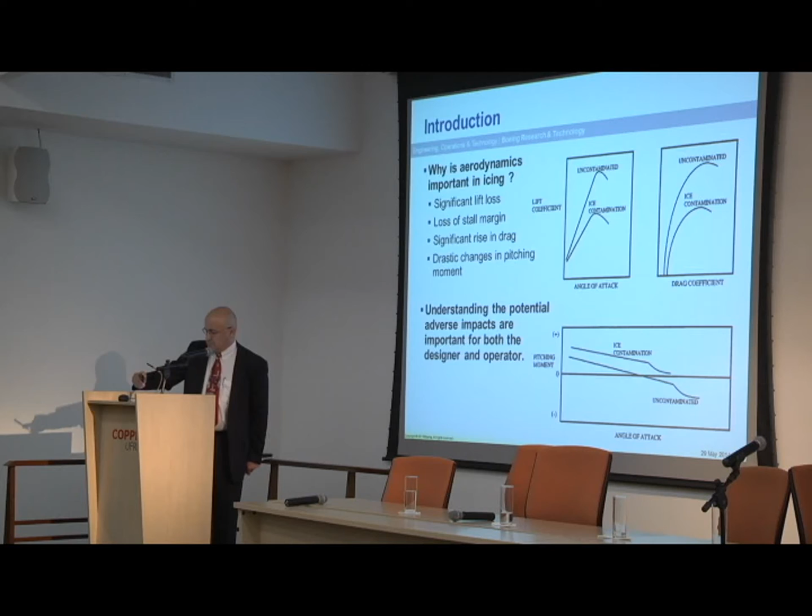So I was looking at historical data, digging up historical pictures - how far back can I go and find work being done in aircraft icing? These two next charts essentially show pictures - the first one here is an old DC-2, I think it is, back in the 1940s, where this work was done in combination or in collaboration between McDonnell Douglas, which is a former arm of the Boeing company, and NASA. At the time it was called NACA.

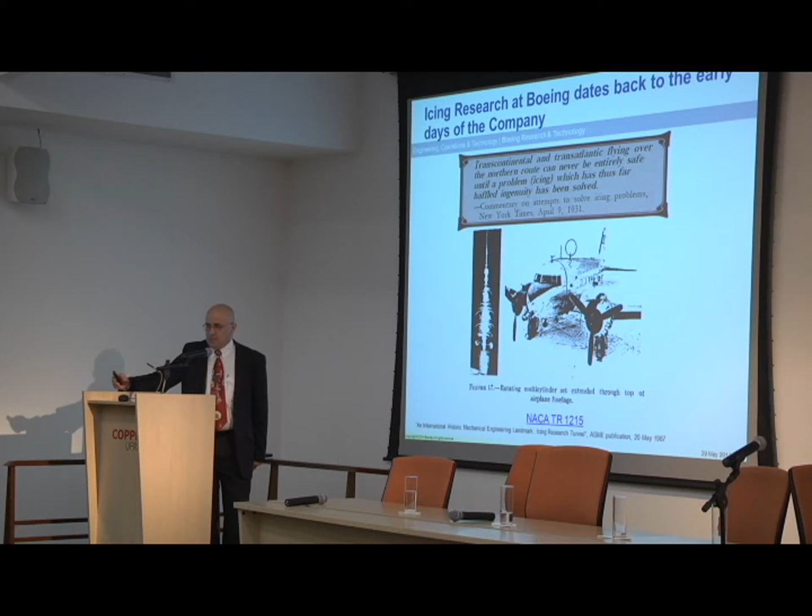And in this test, they mounted a rotating cylinder on the fuselage of the airplane. Through this measurement here, essentially, they're trying to document what the size of droplets are as you fly through an icing condition. The material that I extracted out of the American Society of Mechanical Engineers publication dates back to a New York Times article in 1931.

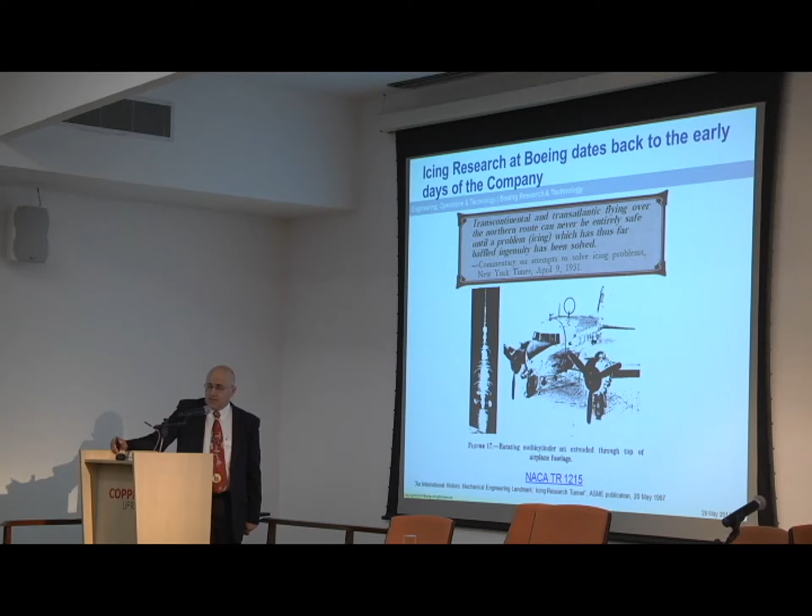Which essentially is referring to, look, if we're trying to make general aviation available to everybody - not just from 8 a.m. to 4 p.m., not just on days when the temperature is 75 degrees on the ground and sunny - if you're trying to do that, we really have to lick some serious problems, and one of them is icing. These guys recognized that, and in the New York Times, at the time arguably the most important publication in the country, they listed it there.

This is a picture that I dug up from one of the old Boeing archives, and some of you who are really good at recognizing airplanes will probably recognize this is a Boeing 707, right? The only airplane that has a needle coming out of it from this side. These measurements essentially were made back in 1962 in coordination with the Federal Aviation Administration and the Boeing company.

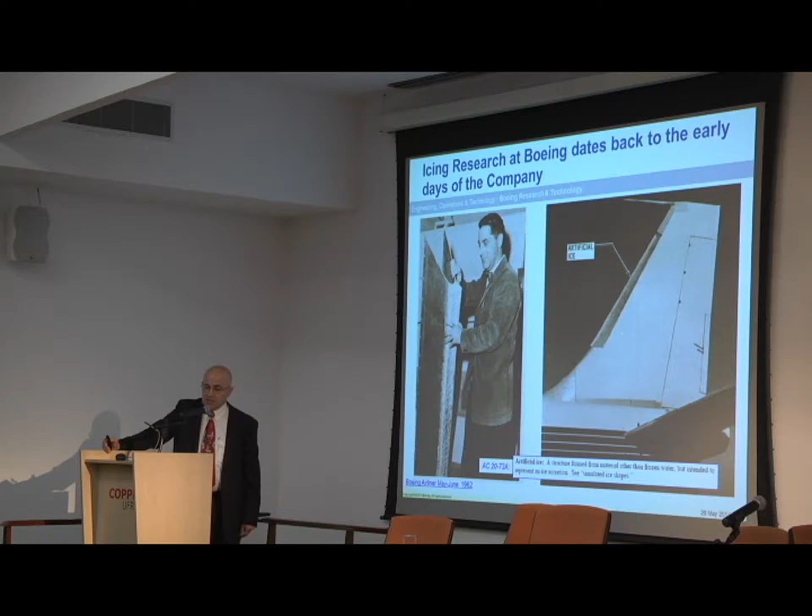Where they're putting simulated ice shapes that were manufactured or generated artificially, and mounting them on the vertical tail here, in order to fly with that simulated ice shape and determine: can the airplane's flying qualities and handling and control - are they acceptable from a piloting perspective as well as a safety perspective.

Okay, now, Boeing Company is the largest private operator of wind tunnels. Just in the United States alone, we have extensive facilities for testing in Philadelphia, in St. Louis, as well as in Seattle.

One key wind tunnel where Boeing is involved in the assessment of icing issues for both its existing airplanes as well as the next generation airplanes is called the Boeing Research Aero-Icing Tunnel, the BRAIT. This picture essentially shows a section of a wing, aircraft wing, where testing of relevant or representative icing conditions is taking place. This wind tunnel is located in Seattle, and it is in use almost constantly.

I am, of course, very much interested in seeing the icing tunnel that is going to be inaugurated tomorrow, and exploring possibilities if there's any work that Boeing and Brazil can do together in the icing facility, which apparently is the first one in the southern hemisphere.

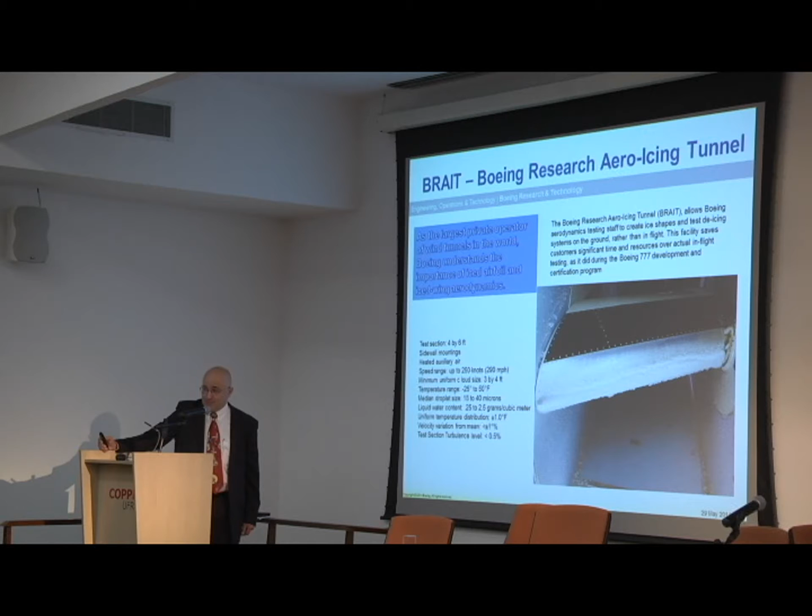We covered aerodynamic simulation considerations, the effect of ice on a range of typical icing environments, like initial roughness type environments, run back and ridge ice, which is something you get if you run into SLD conditions—SLD being the short term for supercooled large drops—as well as partially evaporative conditions, where the leading edge thermal anti-ice system does not fully evaporate the liquid that deposits on the flight surfaces, causing it to run back and refreeze downstream of the heated surfaces.

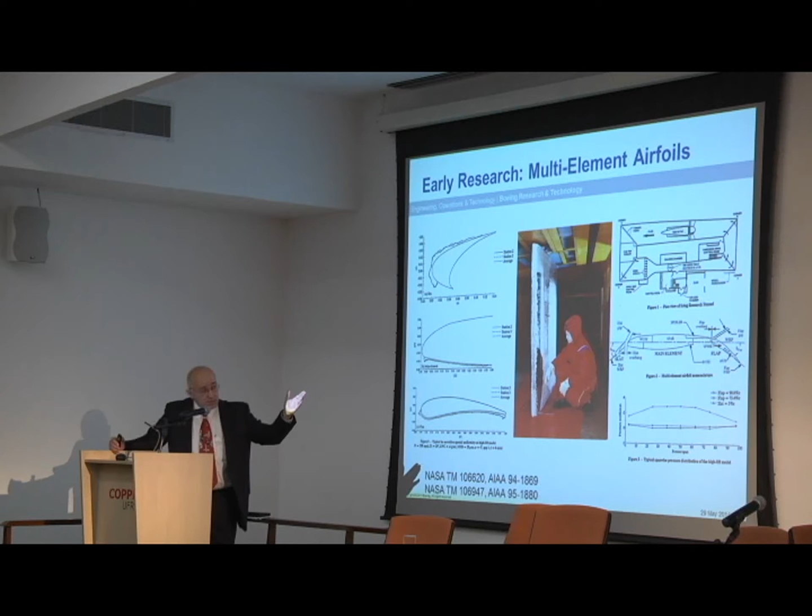The performance is very dependent on what we call confluent boundary layers—there are multiple boundary layers present on this type of complex system. Let me advance to the next chart, which has a better picture. Essentially you have a wake coming off the slat, a wake coming off the trailing edge of the main element, and then a wake coming off the flap.

All of these merging shear layers are very complex to predict. It's not like a simple boundary layer coming off a flat plate. The way the high-lift system develops its max lift performance capability is because of how you place the leading edge and the trailing edge in close proximity to the main element.

These gaps are critical for the performance of the airplane. That's why it was very important for us to understand what happens when you start to accumulate ice on these elements, and the ice essentially starts to impact those gaps that have been optimized for performance close to the ground. This picture shows a series of tests done at different flight conditions, representative of takeoff, landing, hold conditions, and cases where your thermal anti-ice might have gone inactive, things of that nature.

We accumulated a large database of ice accumulations in the Icing Research Tunnel, and we took select ones because these tests are very expensive. We have to be very selective in terms of which ones we pick, but we picked a select few and manufactured them out of material that we could take into a high-pressure tunnel and simulate the environments representative of a large transport airplane.

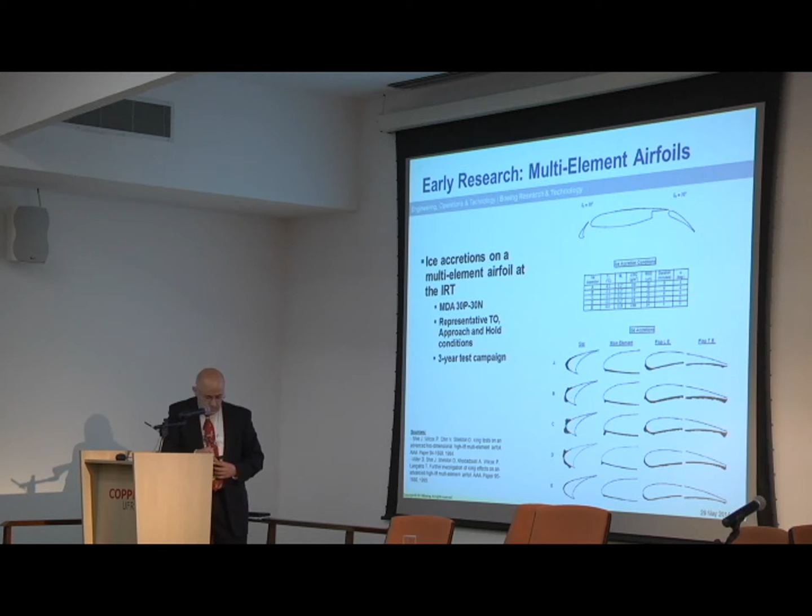What we ended up doing was take these ice shapes into the NASA Langley LTPT, the Low Turbulence Pressure Tunnel, and test them at flight scale conditions. Again, because of the confluent boundary layer, accurate simulation of the Reynolds number, flight Reynolds number, is critical.

In other words, with a high-lift system like this, if it's meant to operate on a Boeing, an Airbus, or an Embraer that wants to fly at about 35,000 feet, with a typical approach condition of about 200 knots, you're talking about Reynolds numbers on the order of 30 to 40 million.

Everybody knows how to calculate a Reynolds number, and you can quickly imagine what you need to do to calculate the Reynolds number when you're in a low-speed tunnel. That's one of the reasons why we increase the pressure in some of the tunnels, which is why we call it a pressurized facility. By increasing pressure, you're directly increasing density as part of the equation of state, and by increasing the density, you can increase the Reynolds number significantly.

What that really translates to is that I cannot test this kind of airplane or airfoil in a low-speed tunnel and assume the results I get are going to be representative of flight scale conditions. This is critical for a transport airplane designer. You have to understand what the flow field is, you have to understand the aerodynamics, in order to design for these critical safety conditions.

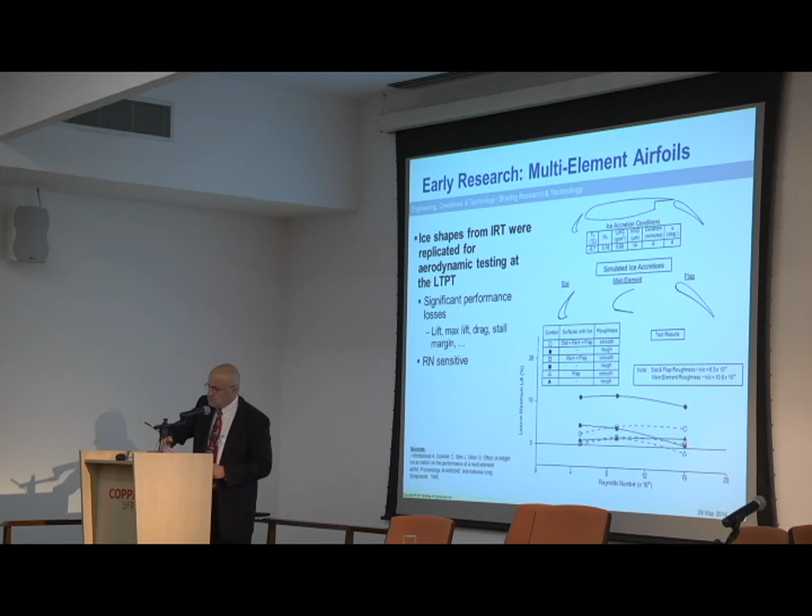Another topic we had to investigate, going back about 20 years, is what's called in-spar frost, or under-wing frost. Essentially the reason for this type of ice formation is that you take a wing of an airplane - in this case a 767 parked in Frankfurt - that just landed after flying at about 35,000 feet.

As a rule of thumb, if your temperature on the ground is around 70 to 75 degrees Fahrenheit, about 25 degrees Celsius, at 35,000 feet you're potentially at minus 60 degrees Fahrenheit, which is maybe about minus 50 degrees Celsius.

That very low temperature starts to impact the aircraft. Both the skin and just about everything that is not insulated will be very, very cold. Well, guess where the fuel is stored in the airplane? It's usually stored in the wings. This is the front spar of the wing.

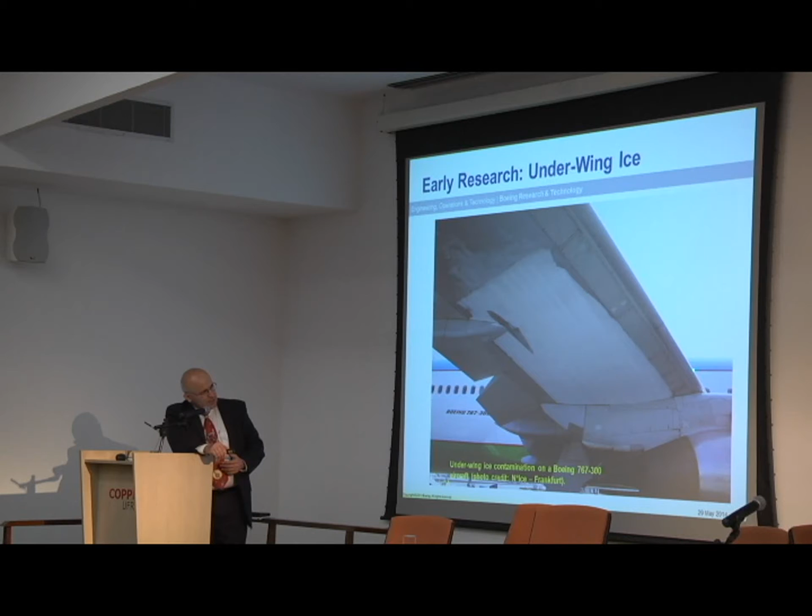You can see the engine, this is the leading edge. The front spar of the wing is out here, and the aft spar of the wing is typically somewhere just upstream of the control surfaces.

That cold-soaked fuel, turned very cold from flying at high altitude, when you land - say you land in Rio on a nice day where humidity is on the order of 80% - and the moisture conditions are just right, that cold fuel will force the aircraft skin into a condensation mode. Just about all the humidity in the air will start to condense on the aircraft surfaces.

Part of that is in close proximity to the fuel tank, which acts as a major heat sink because of all the fuel remaining in the tank, causing that moisture condensation - and that's where you get what is called in-spar frost, or in-spar ice.

The occurrence of this has become so common that both the FAA and, before EASA, what was called the JAA, became very interested in what the performance effect or impact is.

Because when this airplane lands, typically after a 1 or 2 hour flight, it's not done for the day - there's still fuel in it. They'll take about an hour to deboard passengers, take all the trash out, bring new passengers on board, put in fresh food, clean up the toilets, get it ready, and head back out again.

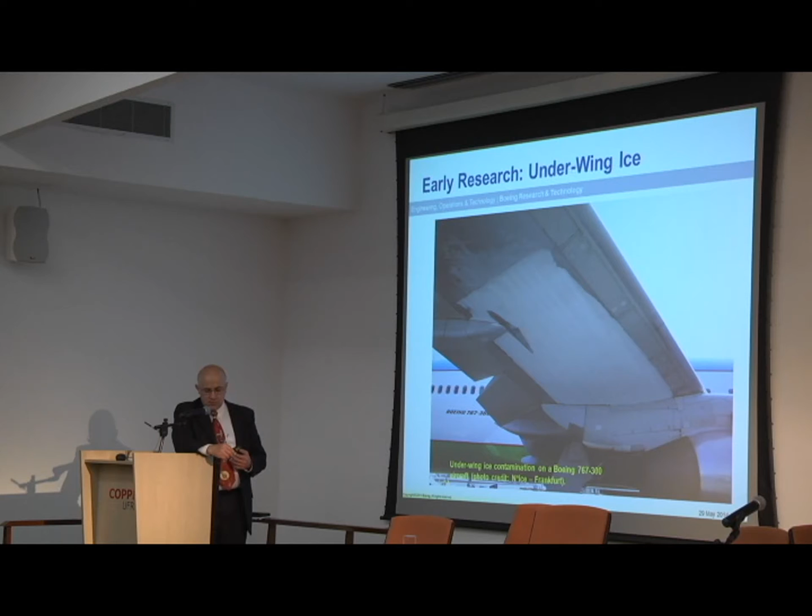Those results are shown with the wind tunnel test we did at the LTPT, the low turbulence pressure tunnel. We took an airfoil that was representative of takeoff conditions.

Boeing airplanes typically have their leading edges sealed, so you can see that in a sealed slat type configuration. Some other airplanes, I think some Airbus configurations, take off and land with what we call a gapped leading edge configuration, shown up here. We tested this configuration in the low turbulence pressure tunnel, and you can essentially see that the impact to max lift degradation as well as stall margin degradation is minimal.

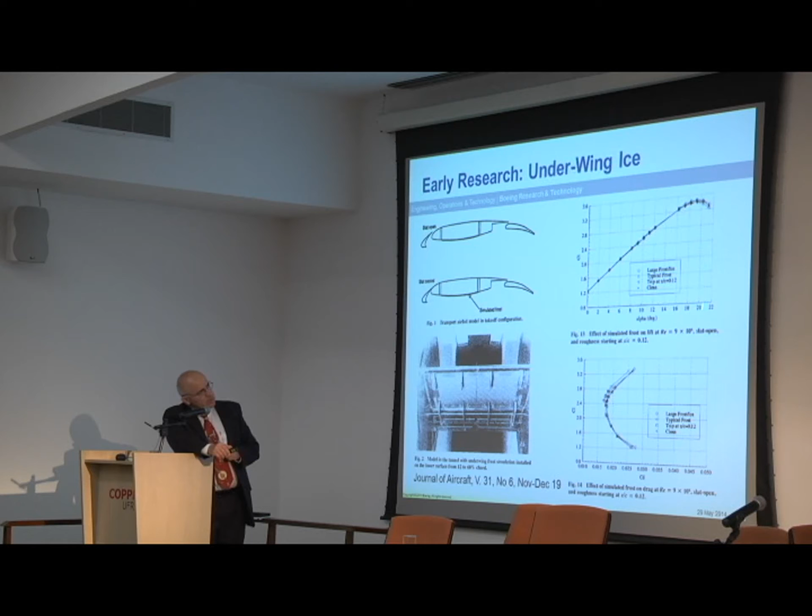And this gave us assurance that this type of meteorological phenomenon is not a hindrance to aircraft operations.

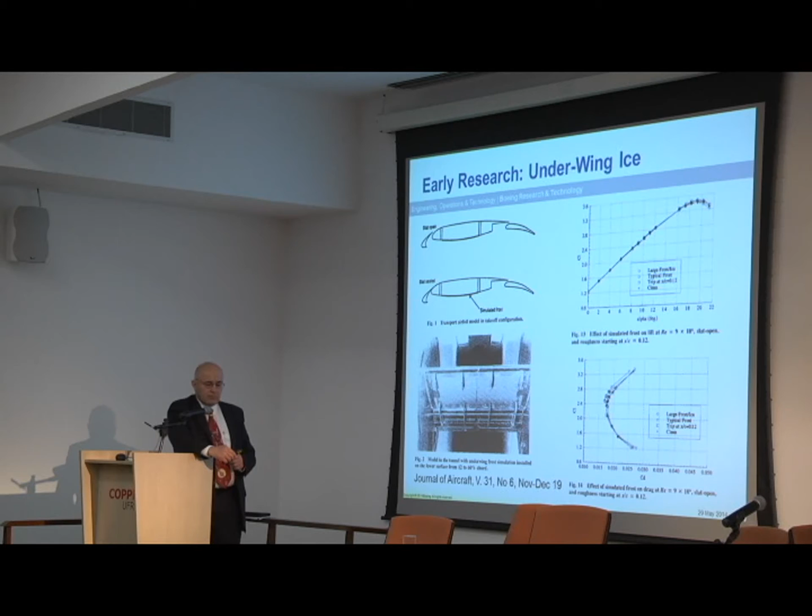So let's switch now to some of our current work. First I'll touch on rotorcraft icing, then switch back to transport airplane icing, and we'll finish off with spacecraft icing.

Rotorcraft icing, essentially what's listed on this chart is truly representative of the challenges we have in the world of aircraft icing, predicting ice-shape formations. Characteristic lengths in any kind of engineering problem, characteristic lengths, characteristic time - understanding that is very, very important.

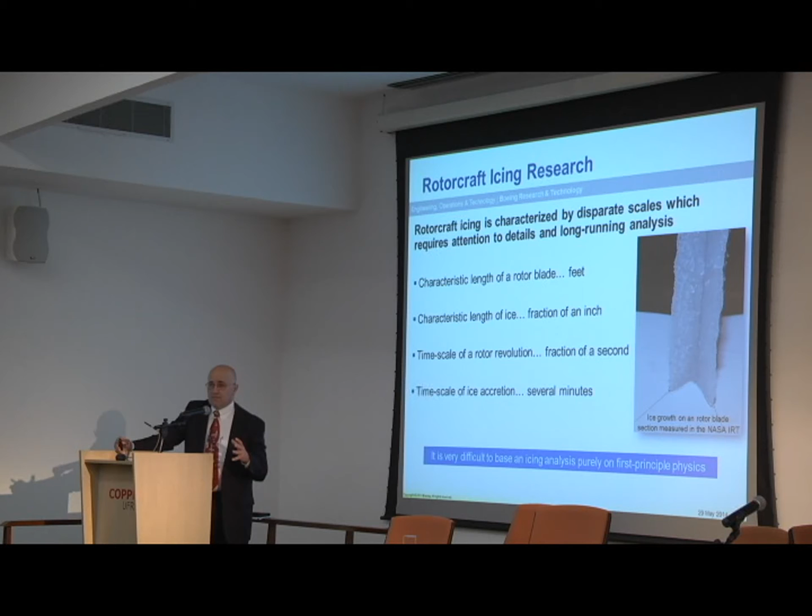So it's very difficult to use first principles to formulate the icing problem and really try to characterize it well. That is one of the reasons why, since the 1930s, the icing problem to this day still remains a challenge.

We have to do a lot of testing, both flight testing and ground testing, to make sure the airplane is safe. From a designer's perspective, my ultimate goal is that we can do all of the simulations in a computer, because that means we can do it efficiently. With testing, whether ground test or flight test, there's always a chance something may go wrong, and that's not a good thing. But in a computer, I can make all the mistakes I want and learn from it. We're still far from being there in the area of icing, but that's the push, we eventually want to get there.

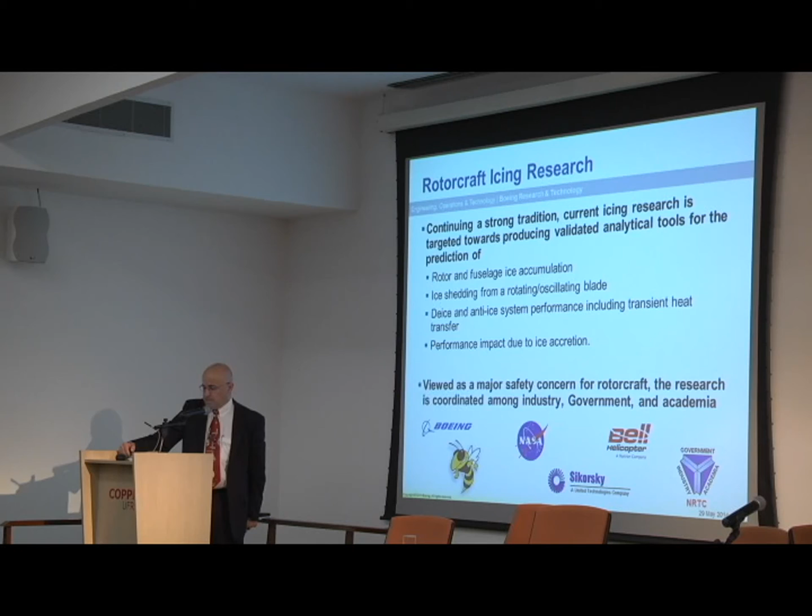Testing has been done by our Rotorcraft community at the Boeing company. Our primary testing facility is at the NASA Glenn Icing Research Tunnel because of its size. Tests were done in 2010 and 2013 to accumulate a large database of ice accretions to compare against the emerging prediction methods.

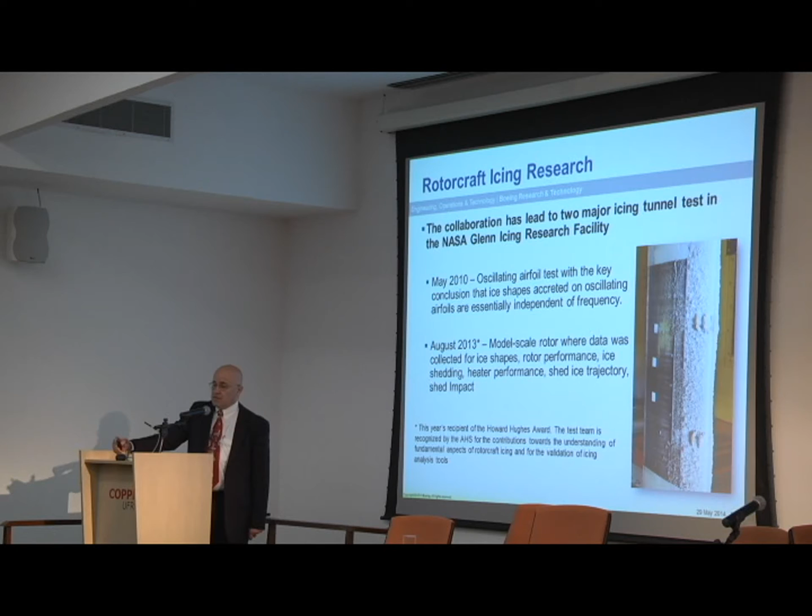This chart essentially shows how testing at Boeing is done in partnership with both NASA as well as the consortium, listed in the lower right-hand corner. NRTC stands for National Rotorcraft Technology Center. Boeing gets involved with a variety of government agencies as well as industry to solve this complex problem. As Boeing expands its relationship with the government of Brazil and expands our infrastructure in the country, this is potentially an area we need to look at for future collaboration.

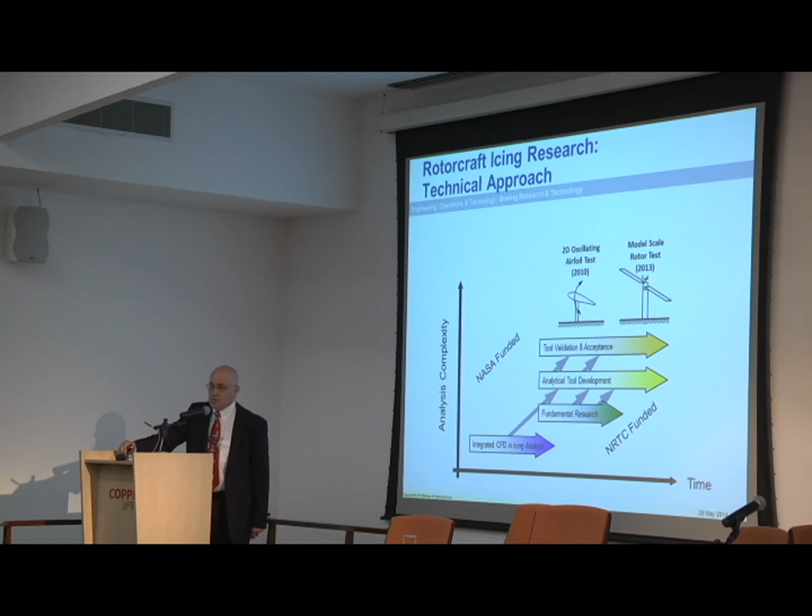Role of CFD - Computational Fluid Dynamics - is critical for us in many areas, in aircraft design and rotorcraft design. This picture shows a tool we use very heavily, called Overflow. Overflow is a simulation that takes advantage of the Reynolds Averaged Navier-Stokes form, RANS, on a structured grid type technology to predict the aerodynamic characteristics of a flight vehicle, in this case a rotorcraft.

It is coupled with what we call an ice prediction method, called LEWICE. LEWICE essentially is the Lewis Ice Accretion Code. Back before NASA Glenn was called NASA Glenn, it was called NASA Lewis, and the tool was developed there, hence LEWICE. It's a very heavy workhorse for us - just about all of the industry understands it and uses it for ice accretion methods. This picture shows the kind of simulations we've done using LEWICE on a rotorcraft type environment.

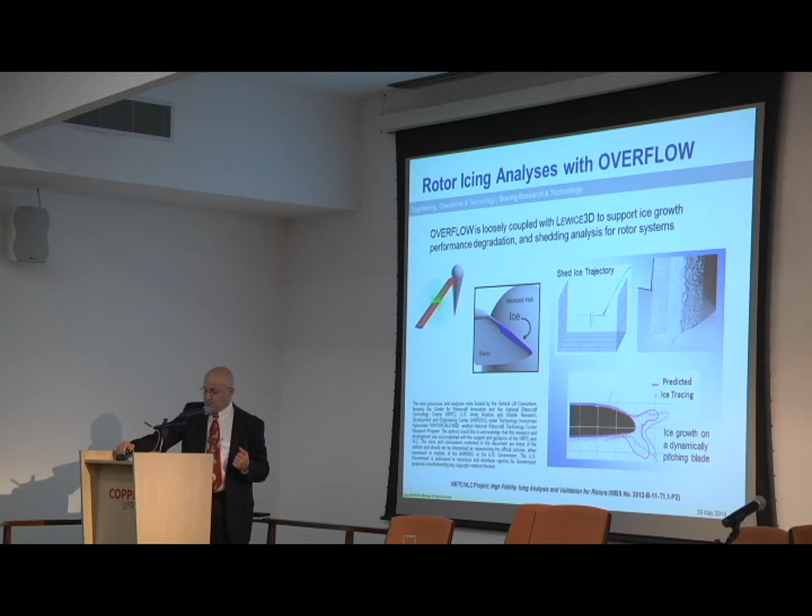Now, I mentioned the role of CFD, and the chart you're looking at from Boeing is typically called a walk-around chart, because it's like walking around an airplane, maybe with Google glasses, with the information in front of you. Any part of the airplane you look at shows what has been the role of computational fluid dynamics in developing the next generation Boeing airplane, the Dreamliner 787.

On top of the chart, you'll see colorations showing where CFD has been used, ranging from heavily to some limited utilization. And in the middle of that picture, on the starboard wing, you'll notice that icing is highlighted there.

We have done some CFD utilization to model what kind of ice formations we can expect. But as I pointed out, this is such a complex area of physics that it's difficult to do all of that in CFD. So we end up doing the initial predictions in CFD and then take those predictions into a wind tunnel test and also into a flight test to validate the airplane's performance that way.

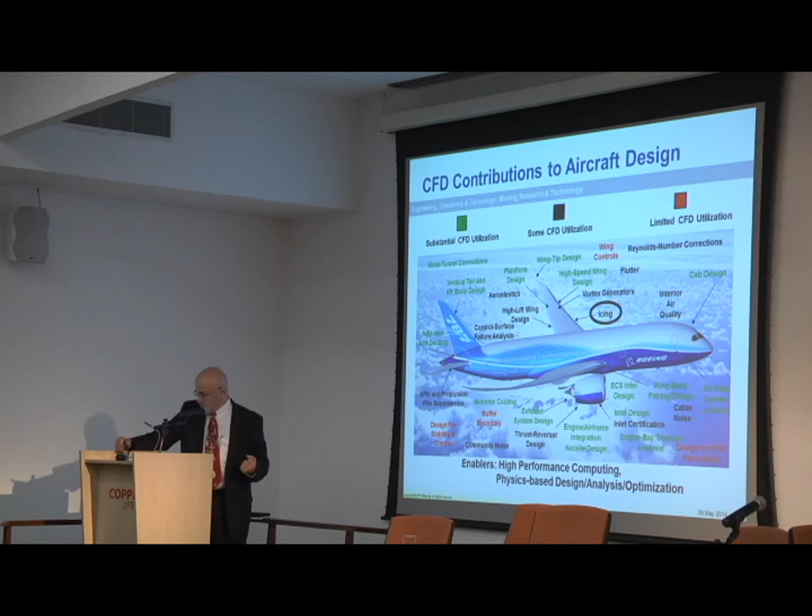So, generating ice shapes computationally - why is it important? When I look back at the historical literature, the way Boeing, McDonnell Douglas, and other companies have generated ice shapes has been with a lot of difficulty. You have to go into a flight test facility or a ground test facility like the icing tunnel in Cleveland or the icing tunnel at Boeing.

First you grow the ice shape, then you have to take a mold of that. And usually taking a mold is a very heat-intensive procedure, so in the process you're melting the ice. So the question is, how do you, with some level of fidelity, capture all the important features in the ice shape? It's very difficult to do. That's where the computational methods come in.

LEWICE 3D, again, is a code that was developed by NASA. It greatly reduces the need for us to interpolate or even extrapolate ice shapes to generate wind tunnel model parts.

And of course, there are technical challenges here, and here's a message for all the students in the room. Whether you're using a wind tunnel or computational methods, you have to understand your tool. You need to know what its capabilities are, and you also need to know what its limitations are. You can't just say, my God, I've got this tool that will do everything. Not true.

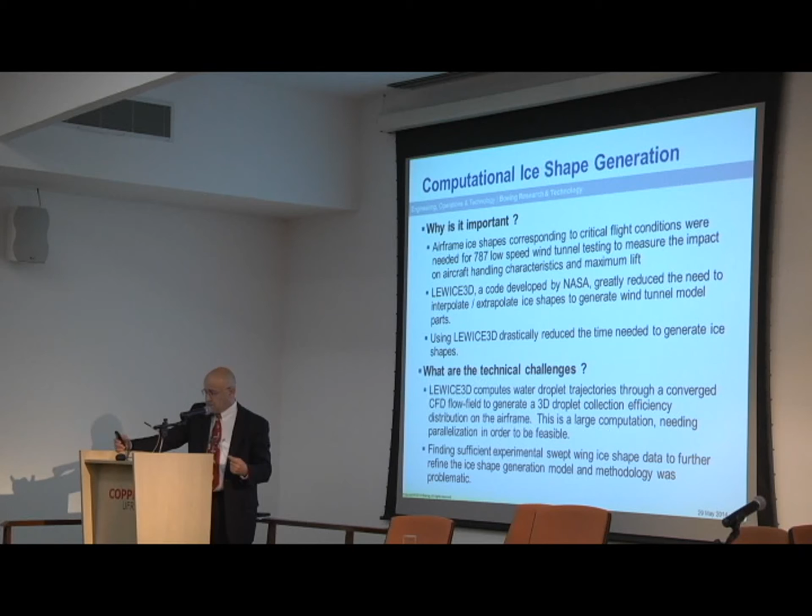So what we're trying to do with LEWICE is identify what flight conditions are considered critical for airframe icing. Then we use what we call Navier-Stokes solvers - the two primary tools we use at Boeing are Overflow or CFD++. These are run with the identified conditions to generate flow fields for input into LEWICE 3D, which then generates collection efficiency and ice shape cuts.

On the lower left hand, you'll see the collection efficiency calculated by LEWICE on a 787 type configuration, and on the right side are the predicted ice shapes span-wise. So you're getting both a representation of the ice shape and the limits of where the tool predicts you'll collect ice for any particular environment.

What that tells us, from a design perspective, is how far back on the airplane we need to protect the leading edges and aerodynamic surfaces. The ice shapes tell us what we need to assess in flight test and wind tunnel test to really evaluate what the performance losses are.

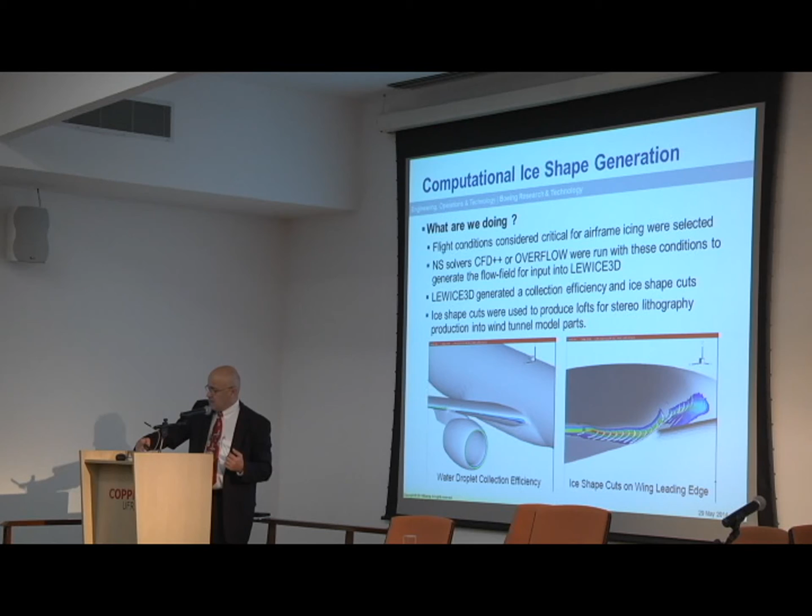So from an aerodynamic perspective, our goals for icing are - our ultimate desire is to eliminate icing tunnel testing for developing or generating ice shapes for aerodynamic analysis. I think we're probably still about 20 years away from doing that, but that is a desire. We need to continually work at it.

And we want to streamline the icing process because Boeing takes considerable measures in determining what the flight environment of the aircraft is going to operate in. We're not in the business of developing airplanes that will only fly on a nice, beautiful, sunny day where the probability of running into adverse conditions is minimal. Your airplane really needs to be able to fly in all kinds of conditions.

And just as importantly, we want to improve the effectiveness of the entire process and ensure that the critical features in the ice growth calculations are captured.

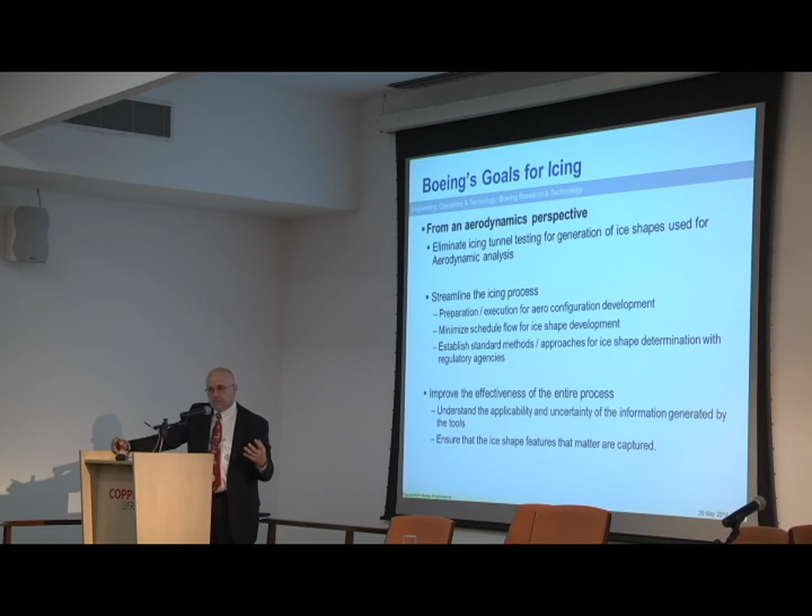So LEWICE 3D is the workhorse for us, and this is the current Boeing ice accretion modeling tool. It captures all the 3D icing information that we believe is of relevance: impingement limits, water catch, and some of the shape characteristics. This is really where the weakness is - some of the shape characteristics. And it is that shape that becomes an aerodynamic issue for us.

The two first elements are really important. Impingement limits allow us to know how far back we need to protect the surfaces. Water catch is the amount of water, as a function of time, that we think is going to land on the aircraft surfaces. What that does for the designer is tell how many BTUs, how much heat, you have to apply - either in the form of electrical energy or offload from the engine heat - into the leading edges or the aerodynamic surfaces to keep them clean.

Two very important areas. The third important area is: what is that shape that grows as a result of accumulation of water, if left untreated - if the thermal anti-ice system is not operating for some reason, if it's broken in flight? What is that shape going to look like, and what is its impact on aerodynamics or the overall performance of the airplane? That's the part where LEWICE is still weak and forces us to go into a wind tunnel and eventually into a flight test. Very, very expensive endeavors, but critical for us to do because we need to know what the safety of the airplane is.

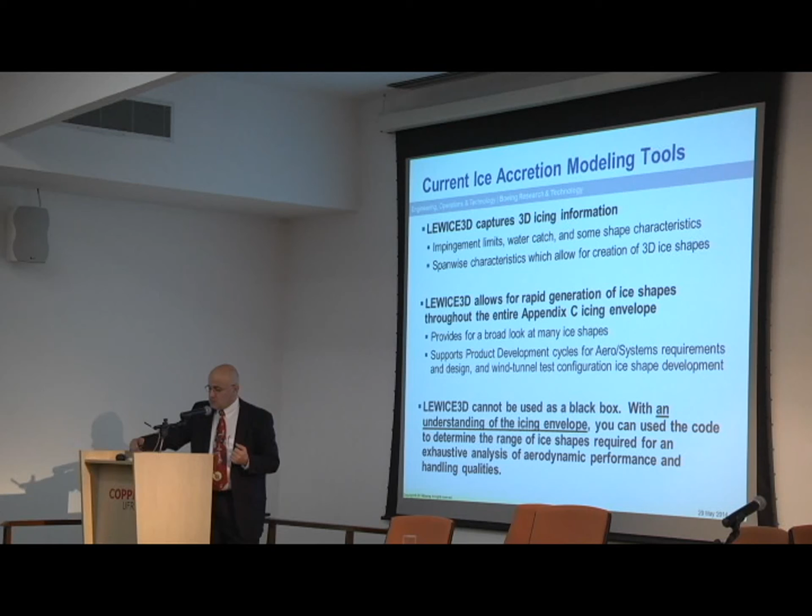So going forward, as we contemplate doing collaborative research, let's say with COPPE, with UFRJ, or with other entities in Brazil, it is becoming more and more difficult for Boeing to share what is called its proprietary geometry - next generation 777 or 787 - that's just the environment we live in. So the question is, if we can't use something that is very specific to Boeing, or very specific to Embraer, or very specific to Airbus, what can we use?

Absent those options, what we have come up with in partnership with NASA is to design what is called a Common Research Model, CRM, which is a generic geometry. Boeing designed this configuration, which essentially, when you look at it, is representative of a modern transport airplane. If I didn't tell you this thing was a generic geometry, it would be very easy to think that this is a representative 777 or Airbus 350 type configuration. So it has all of the features of a modern airplane - representative, but generic - and we released it publicly so that the whole world can use this geometry to do calculations, whether aerodynamic or icing calculations.

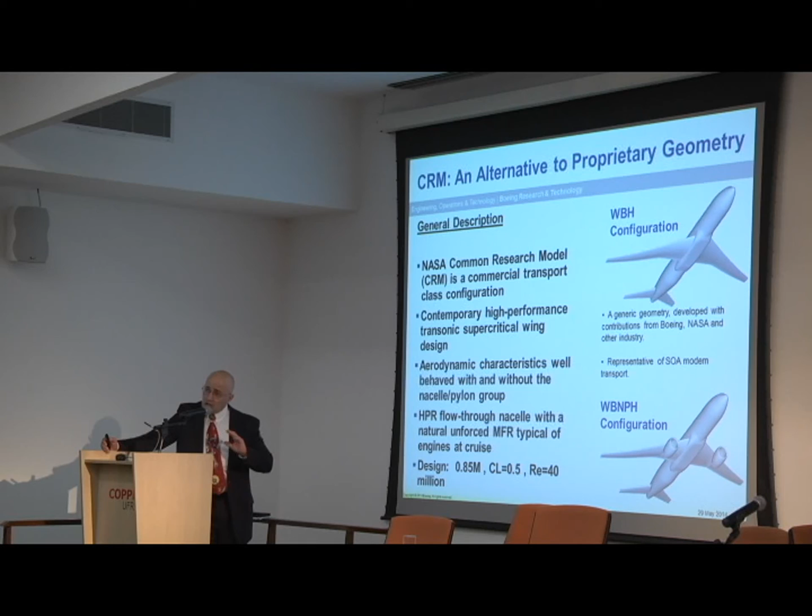The Common Research Model is designed by Boeing. It was a baseline for the CFD drag prediction workshop - some of you might be familiar with the drag prediction workshop that the American Institute of Aeronautics and Astronautics holds on a regular basis. And it represents a typical wide-body airplane.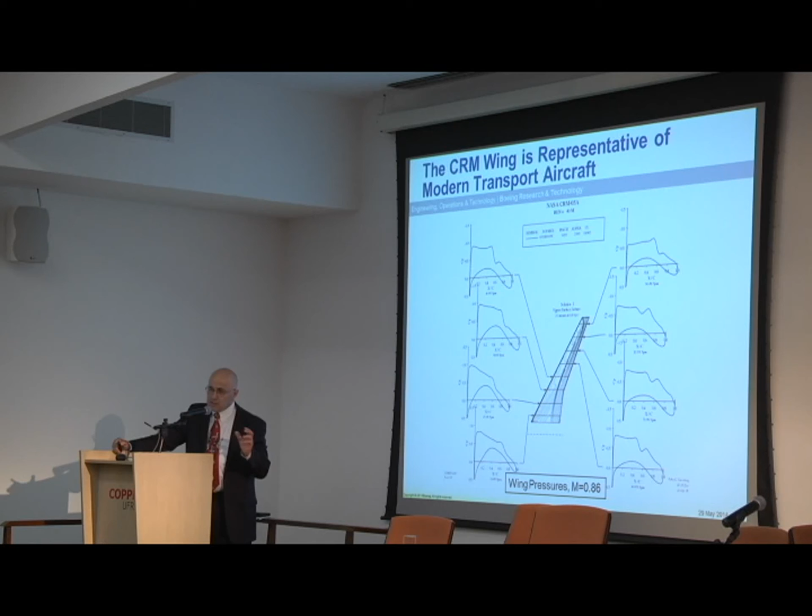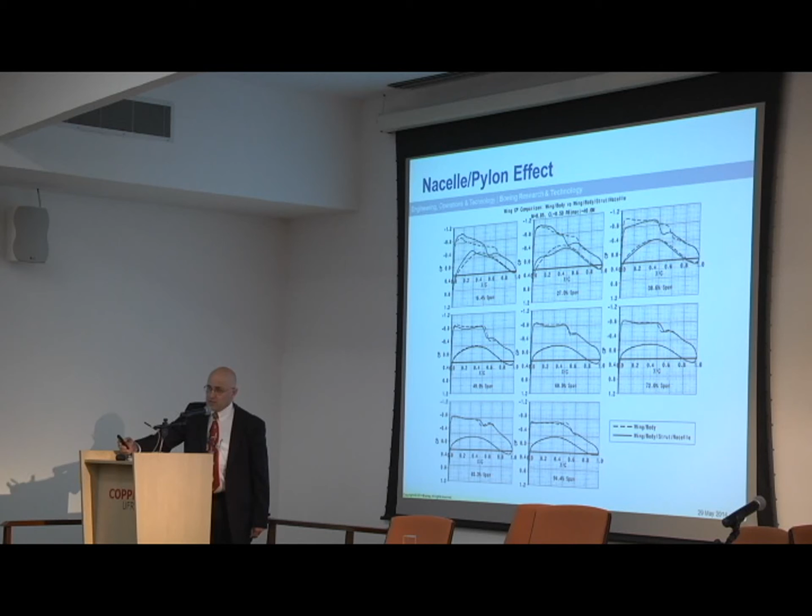What happens if you put an engine and a pylon on this wing? That's shown on this chart with the solid lines. When we added the engine and pylon, it behaved exactly as we'd expect a large transport like a 777 or an Airbus 350 to behave. This kind of configuration has become a generic test bed for validation of emerging CFD prediction methods, not just for icing.

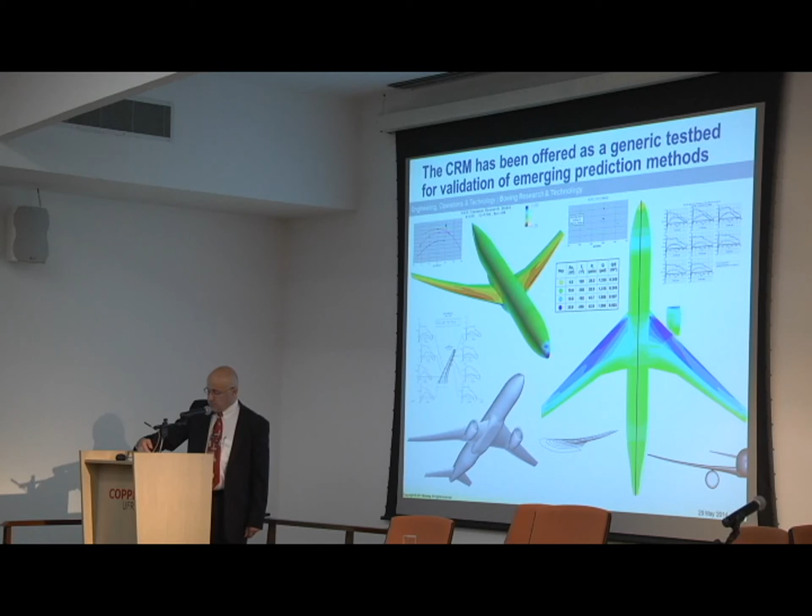The contours you see here are representative of CFD calculations done not just at Boeing, but by a variety of interested parties in this configuration, both for the unengined and engine configurations.

The groups that have so far expressed interest in the Common Research Model are folks at the Drag Prediction Workshop and COMSAC, which stands for Computational Methods for Stability and Control Analysis. Various wind tunnel facilities have also expressed interest and are in the process of building a wind tunnel model of the configuration to test it aerodynamically.

The National Transonic Facility at NASA Langley and the NASA Ames 11-foot tunnel, both transonic facilities, JAXA, which is Japan's version of NASA, and in Europe the European Transonic Wind Tunnel, are all in the process of building models of this configuration.

A large cross-section of government and industry have also expressed interest: the U.S. Air Force, Boeing, and multiple other industry members like Gulfstream, Cessna, Lockheed Martin, Northrop Grumman, Pratt & Whitney from an engine perspective, and of course government agencies like NASA, the Air Force, and the Navy.

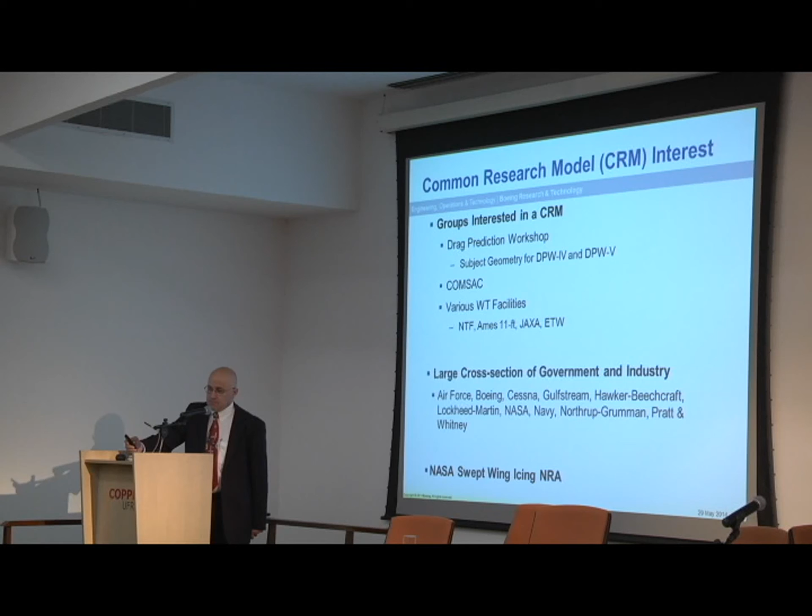Just as importantly, we've started using the NASA Common Research Model for a swept wing icing project that NASA awarded to Boeing and team members, called an NRA, NASA Research Announcement. So what are we trying to do in this study?

Larger airplanes typically have very large leading edges, and a challenge is how you simulate the ice that forms on these extremely large leading edges. If you stand next to an Airbus 380, it will amaze you - the leading edge is so big it baffles the mind how we as humans manage it. So the question is, with regards to icing, how do we simulate the ice shapes appropriately?

The purpose of this study is to develop an approach superior to current methods and determine the ice shapes for swept wings. We're using the Common Research Model to evaluate ice shape characteristics at three different span stations: one inboard, one outboard, and the middle one called the midsection.

The image at the bottom of the chart is a cross-section of the leading edge of the airfoil that has been truncated. With the truncation, we intend to use a single slotted flap to simulate the leading edge pressure distribution and the environment that exists on the flap, on the leading edge of the airfoil. This is somewhat straightforward on a wing with no sweep, but it's a real challenge when the wing has sweep.

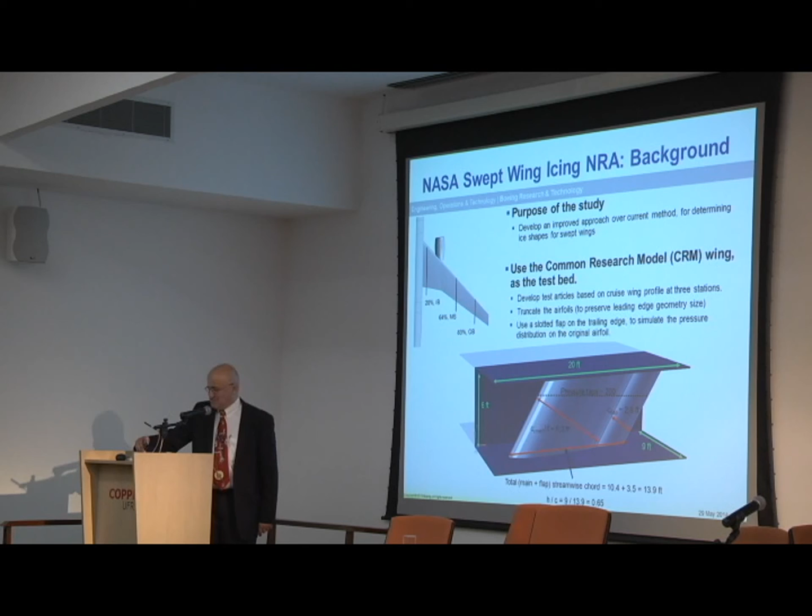So it's okay if you don't want to pay attention to the AIAA conference and you're paying attention to the World Cup. It's just okay. You can usually pick up the documents immediately afterwards.

In the case of an INSPAR, somewhat similar is that you've got liquid fuel sitting in the tank that the launch vehicle is going to use to get up to low Earth orbit. Quite a few of you, I'm sure, are familiar with what the Space Shuttle looked like. The orange tank is where the liquid fuel was stored. The lower section is where the hydrogen is, and in the upper section, close to the radome, is where the oxygen is.

There is some amount of what we call thermal protection system, the TPS. The orange material is intended to provide a certain layer of insulation. But quite obviously, these images show that in certain conditions in Florida at Kennedy Space Center, when this thing is sitting on a launch stack waiting to be launched, in the warm nights and high humidity, the moisture conditions are just right to form frost and possibly some form of ice on the tank, on what is called the acreage.

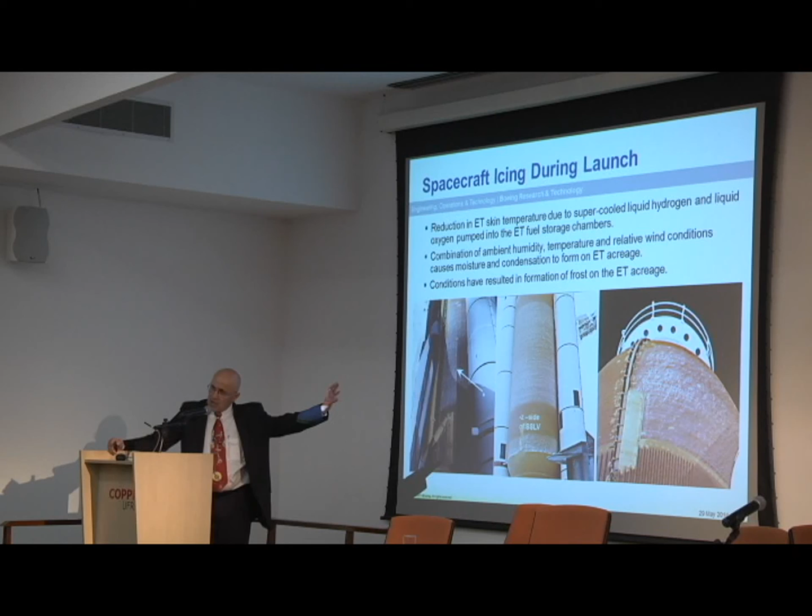So this becomes a challenge for us when in that extreme mechanical and thermal stress environment that is a launch environment, when this vehicle is going up, all this material starts to shed and becomes a projectile. In fact, one of the things that attributed to the loss of the Space Shuttle Columbia a few years back was not so much the ice, but something very similar that I'll show you here next.

So essentially, what you see there in the middle picture is a computational generation of what we think transpired that led to the accident that doomed Space Shuttle Columbia on re-entry. The accident took place during launch as the vehicle was coming off of the launch complex.

A certain amount of foam, essentially an insulator, is near the front of the vehicle. The space shuttle, the orbiter, is mounted to the tank using aft fasteners as well as a forward mount we call a bipod. This is the bipod right here. And the bipod has a certain amount of foam around it that's meant to protect those portions of the mounting mechanisms from extreme amounts of heat.

So you might say, how heavy is foam? Well, foam itself is not heavy, but when it's sitting out there on the launch stack for about 10 hours before getting launched, and a lot of moisture is being soaked by that piece of foam, now this foam becomes something like a wet sponge, somewhat heavy.

So this foam came off on launch, and it became a projectile. Our calculations did validate that it had a high probability of impacting where it caused a significant amount of penetration to the leading edge of the orbiter. Of course, we did not discover any of this until after the fact, and it was quite tragic.

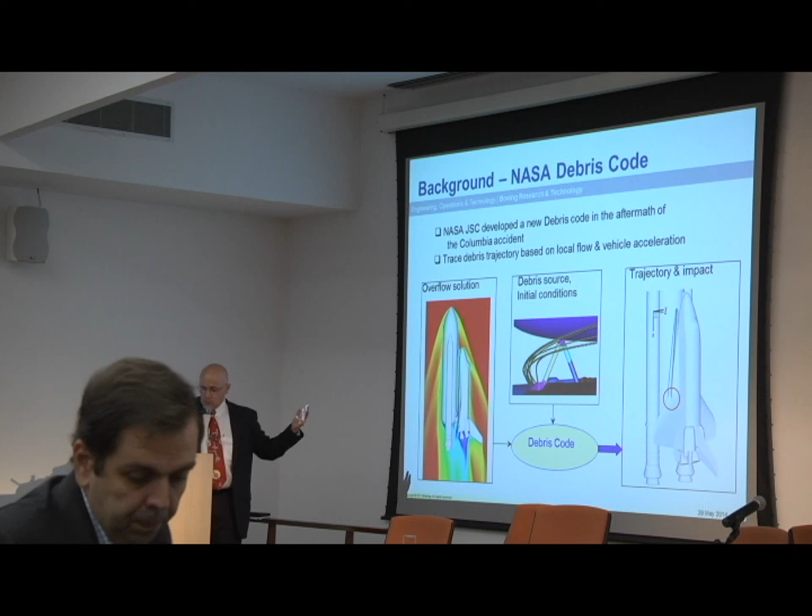However, we are just at the beginning of commercial space travel. Brazil has a very strong space agency. Many other countries have aspirations on getting into low Earth orbit and beyond. So this type of analysis and understanding is very important for us as flight vehicle designers. So what we did was use this tool, developed at NASA Johnson Space Center, and started to work with it.

We really found it to be a powerful tool. It doesn't predict ice shapes, obviously, but it gives you trajectory analysis, and it also gives you impingement location. Now, initially, it was developed for projectiles of this nature.

You know, these things are about the size of a trash can, fairly large. So is it possible for us to modify the drag terms and the aerodynamic terms in the code and make it representative of what you would consider to be a water droplet trajectory? And we did that.

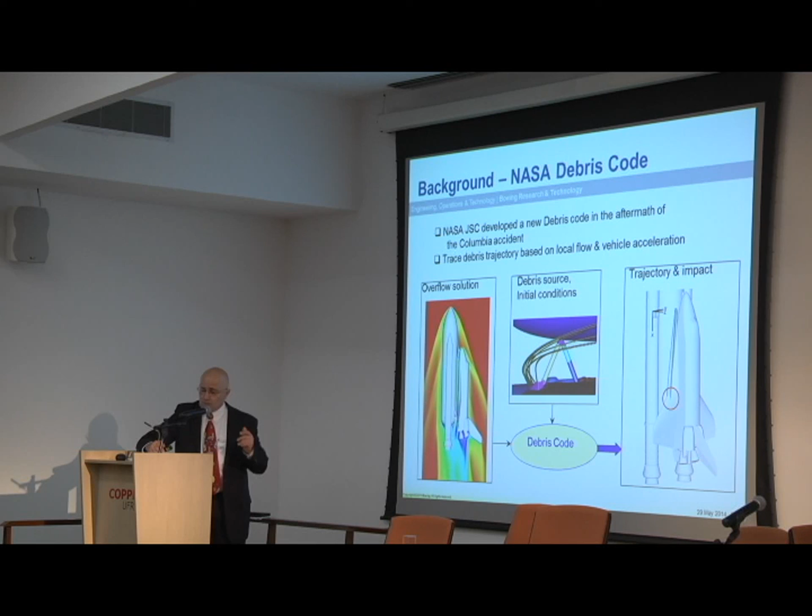So we modified the code. Why did we do that? Because it has significantly efficient search algorithms, and this capability really allows us to do trajectory analysis predictions with rapid turnaround, in a significantly shorter amount of time.

So keep this in mind. If you're not interested in generation of ice, if you're just interested in collection efficiency and impingement efficiencies, this would be a powerful tool to use.

So we implemented a drag model into this thing for micron-sized water droplets, and we started to test it on a variety of aircraft that Boeing was developing. The one on the lower left-hand side is the Boeing 717, which is the MD-95, as well as the McDonnell Douglas-80.

The interest was that if we put an antenna there, which you can see with the orange dot on top of the cabin, this is essentially what allows us to get free Wi-Fi inside the cabin anytime you're flying today. It's become so commonplace that we don't even think about it. But having that bump on the airplane, what does that do to us in the event of an adverse environment?

Just as important is the large cargo freighter, LCF, which is a modified 747 to carry the large pieces that Boeing is manufacturing in Europe, Australia, and Asia. How do these pieces get transported to Puget Sound where final assembly takes place? That's done through the large cargo freighter. The question was, with making that major modification to the 747, what are you really doing to it in an icing environment?

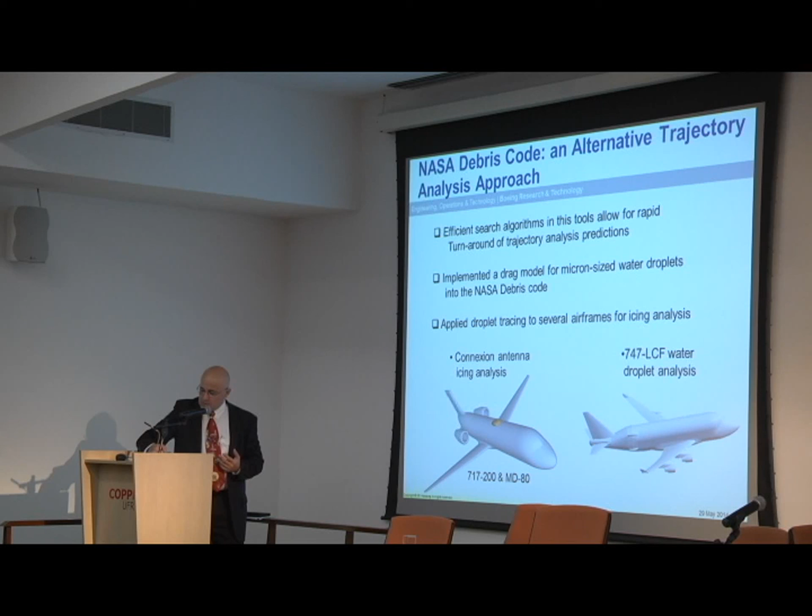So we use this trajectory code to do a first order analysis. Is there even a problem that we need to worry about? If this tool can show us there is a problem, then we're going to go in and look further.

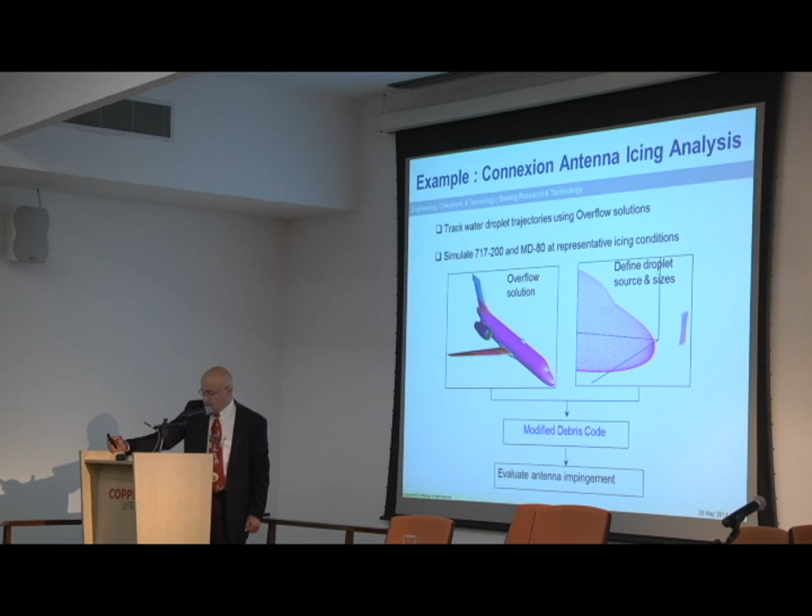So essentially what we ended up doing was predicting the flight environments on the 717 using a computational fluid dynamics solver called Overflow, and applied the modified debris code to it, and we evaluated the antenna impingement. This picture here essentially shows you the areas of impingement.

We did a significant amount of searching to find out where the water droplets were potentially coming from, and this just shows you an example of that. So you can see that there is going to be impingement to the wing, fully expected.

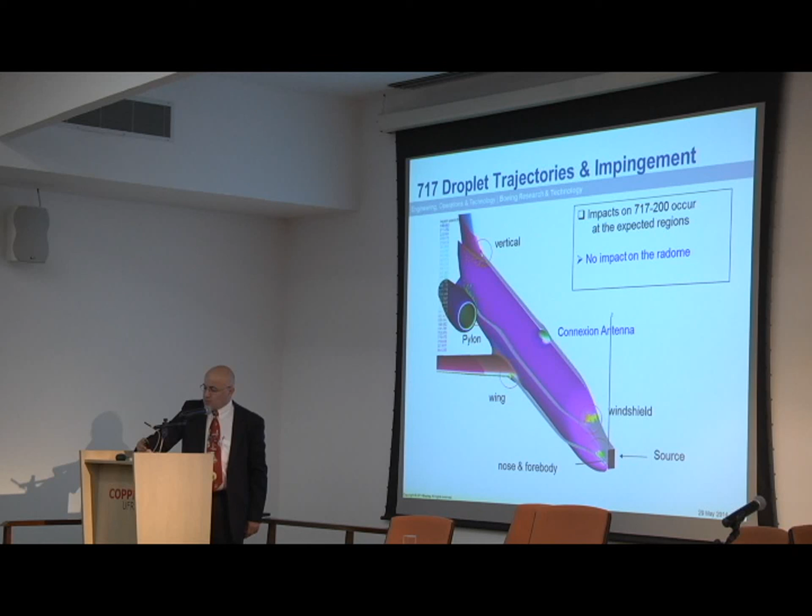There's going to be impingement to the pylon where the engine attaches to the side of the fuselage, again to be expected. There's also impingement to the vertical tail, which we also expect and predict for, and take care of it, also to the leading edges and so on. But we did not see a significant impact to the radome area.

Just as importantly, we wanted to see what the water catch distribution is, the collection efficiency. Remember, collection efficiency translates to how much water collects as a function of time, and knowing that information is important so that you can translate it to how much heat you need on the surfaces to keep them free of any kind of water.

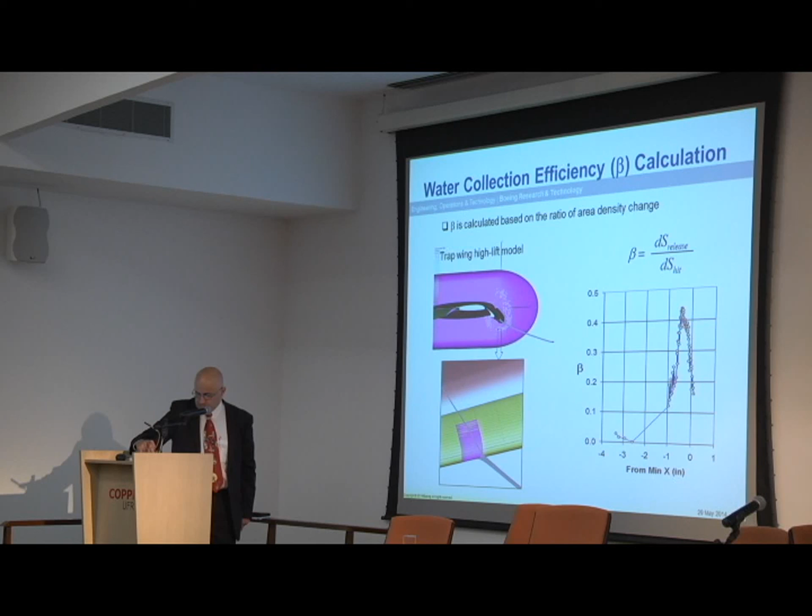So this is an image of the large cargo freighter, and the debris tracing code, the NASA tool, was used to determine if the upper lobe of the fuselage would accrete ice. A holding case was also selected at about 2.5 degrees as a worst case.

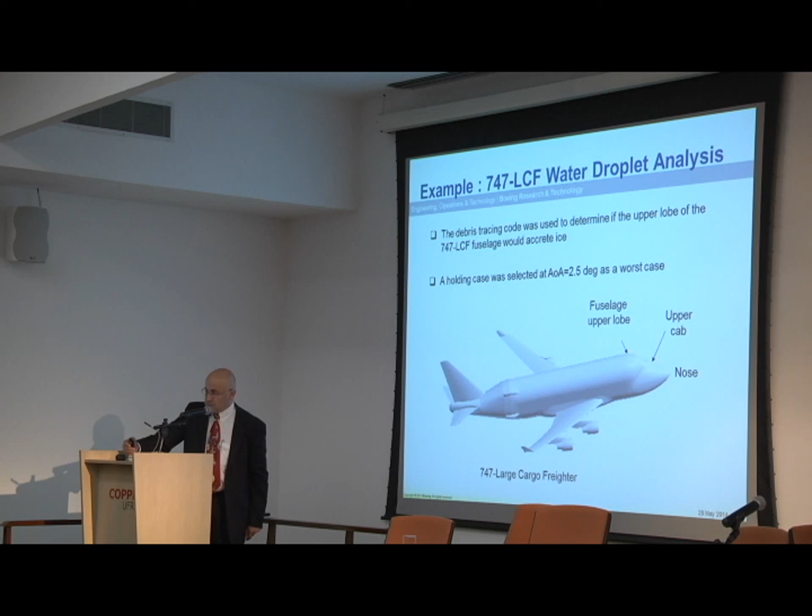Essentially, these results are representative of what you will find in Appendix C, which is the FAA method of determining the appropriate sizes of water droplets. And again, we did not see anything that appeared significant enough to require extra treatment beyond what Boeing does today for these types of configurations.

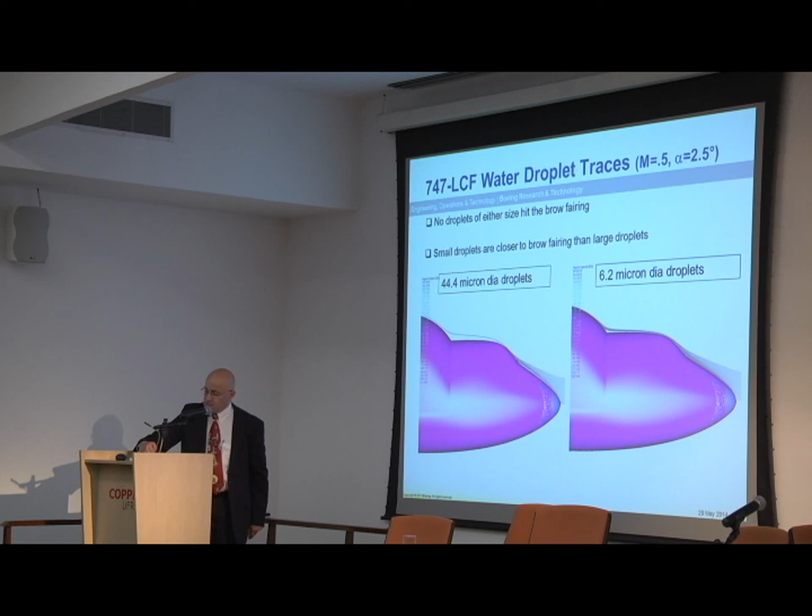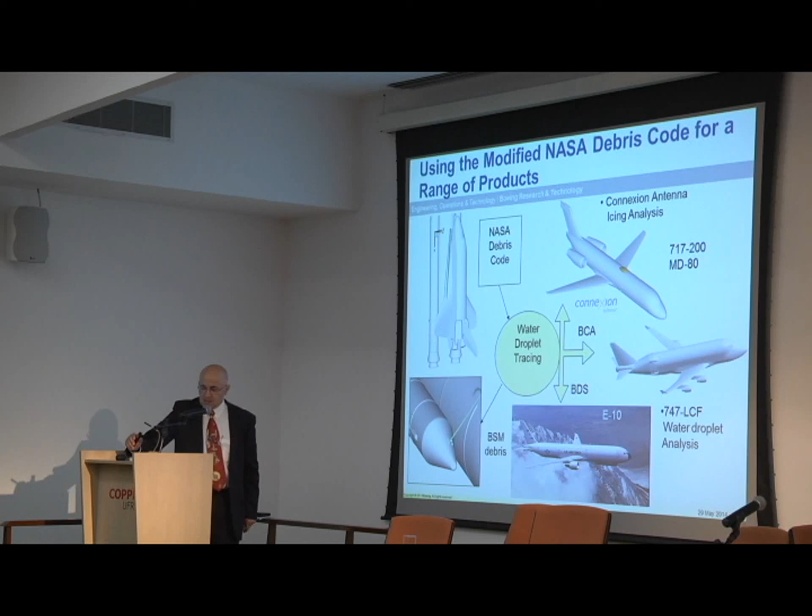So essentially, we've taken a tool that was developed out of spacecraft debris analysis and modified it to apply to a group of different airplane configurations that Boeing operates, all the way from the 717 to the large cargo freighter. The picture down there shows one of Boeing's concepts for a next generation ISR platform.

So in summary, we've been involved in the field of icing research since the early days of the company. The accumulation of ice on flight surfaces, and just as importantly on aerodynamic surfaces, is critical. We fully realize that, and because of that, Boeing spends a tremendous amount of resources, including running an icing wind tunnel almost around the clock every day of the year, to fully understand what kind of ice shapes we're looking at and what we need to do to protect those aircraft surfaces.

And just as importantly, last but not least, Boeing works globally with academia, industry, and government agencies in a collaborative sense, as well as with rulemaking organizations, to help implement what we call analysis-based certification approaches to icing. With that, I would like to thank you for your time, and I apologize if I went longer than I should have. Ready to take questions.